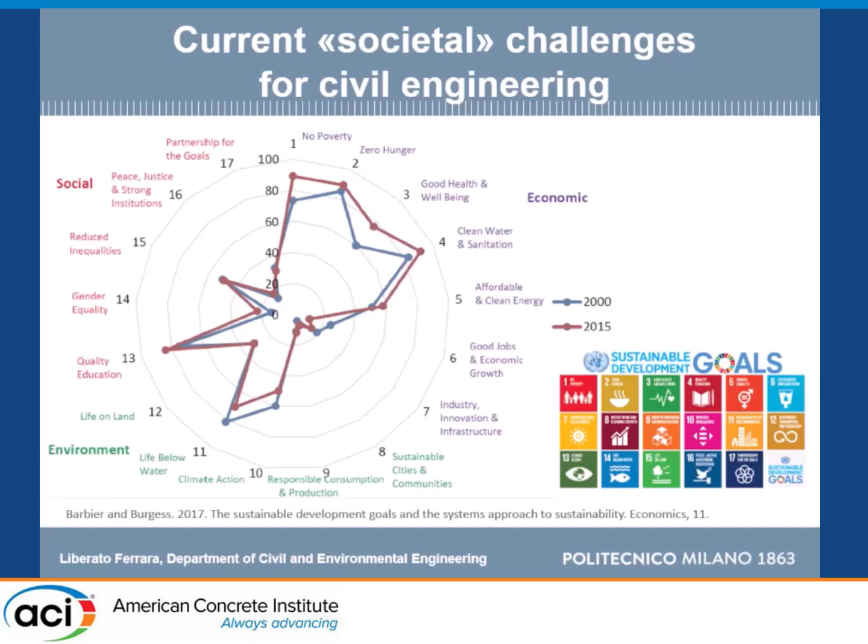Just to set the frame, we all know nowadays that we have to consider in each of our activities the Sustainable Development Goals of the United Nations. Some of them, written here in green, but also number 7, are strictly related to our work, our profession as civil engineers.

So I tried to set the goal. Which scenario? This picture, Tony, you might remember, we were together in Rio de Janeiro and Belo Horizonte in 2018 at the Ferrocement conference. We had a good time there. This is in Rio de Janeiro, the Museum of Tomorrow, Museu do Amanhã.

When I visited it on that occasion, I was really struck by this message: humankind has become a geological force, so strong that it is able to shape the planet. Which way? Well, more than half of the world population, and in a few years two-thirds of it, is going to live in urban areas.

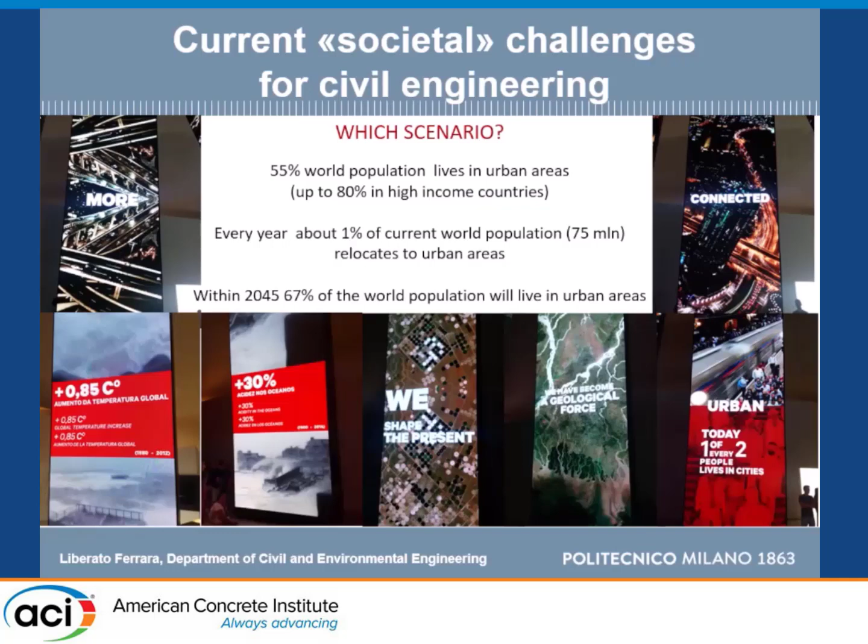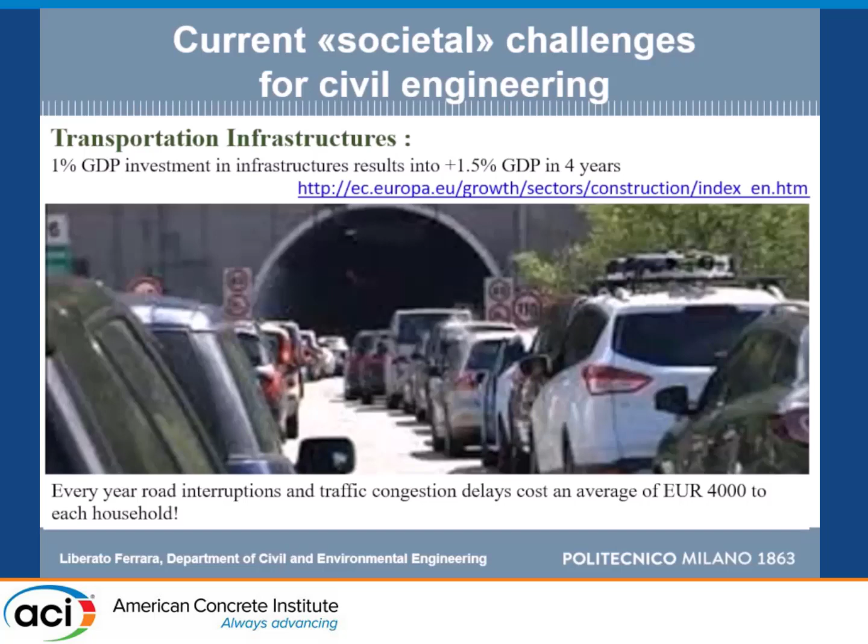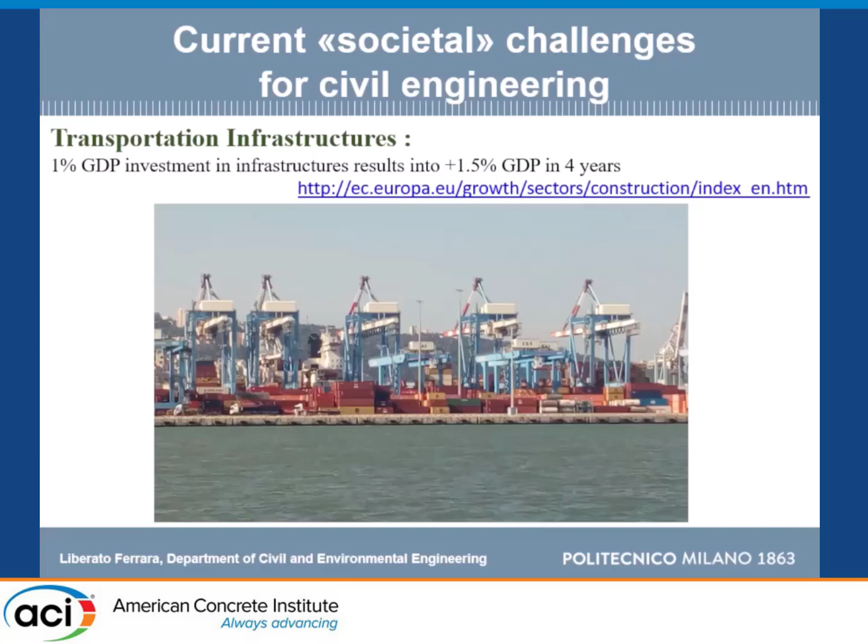We must build new ports for freight. This is the port of Haifa in the Mediterranean. They are increasing the capacity to host freight ships up to 400 meters long. This is a structural service scenario which is quite demanding for concrete structures.

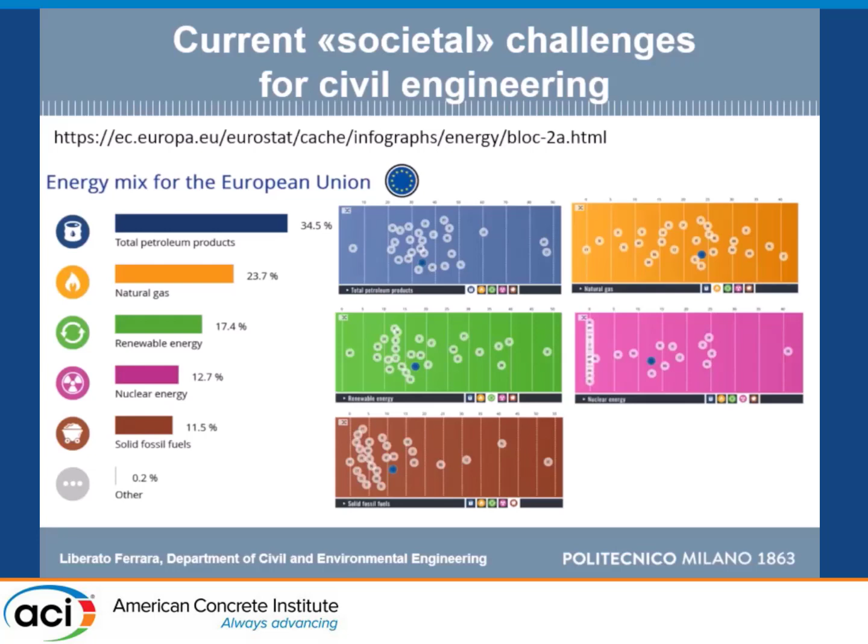We need to protect coasts from extreme climate events. And we also need to reduce our dependency on fossil fuels, which are one of the main problems for CO2 emissions. This is the survey by the European Union, and you can see that we still depend a lot on oil and fossil fuels, 34.5% on average, but in some countries quite much more.

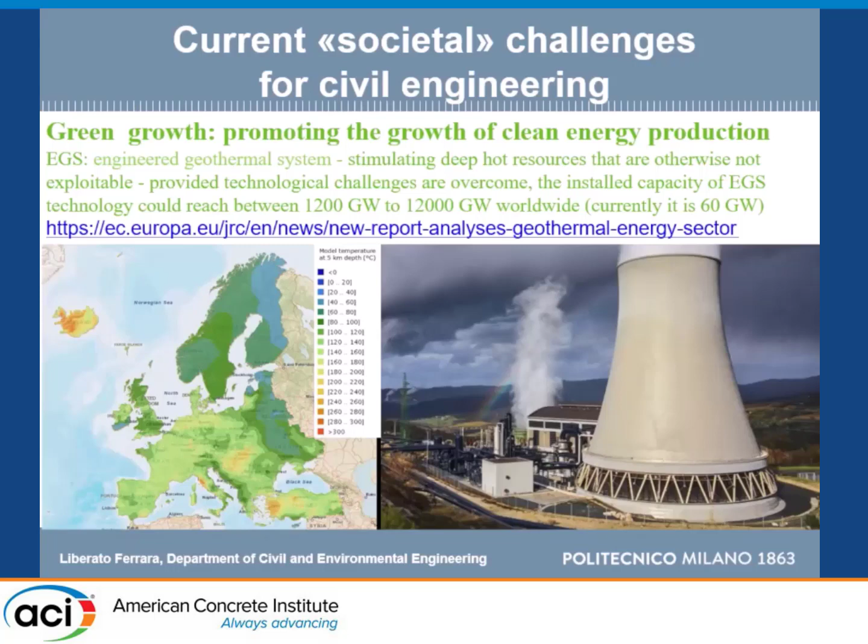So we must go higher, for example in harvesting stronger winds with higher towers. We must go deeper in exploiting at best the geothermal energy and other forms of renewables. And we need concrete for this. There is no alternative at all.

Probably some of you listened to our colleague Professor Karen Scrivener this morning, and according to her estimates and calculations, we will need to deforest an area as large as India every year if we would like to build with timber instead of concrete, which is not impossible, but then you must allow enough time for the timber to grow back and be used.

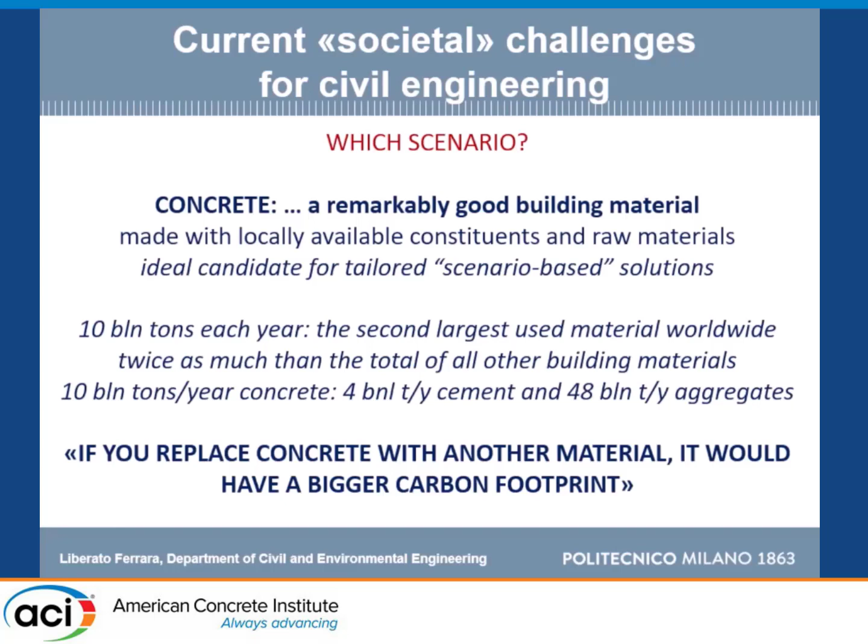But this poses also the problem that we use a lot of natural resources. We need to produce a lot of cement, which emits CO2. So which possibilities do we have? Well, reduce the CO2 from clinker production, reduce the clinker in cement — progress that has been made by the cement industry.

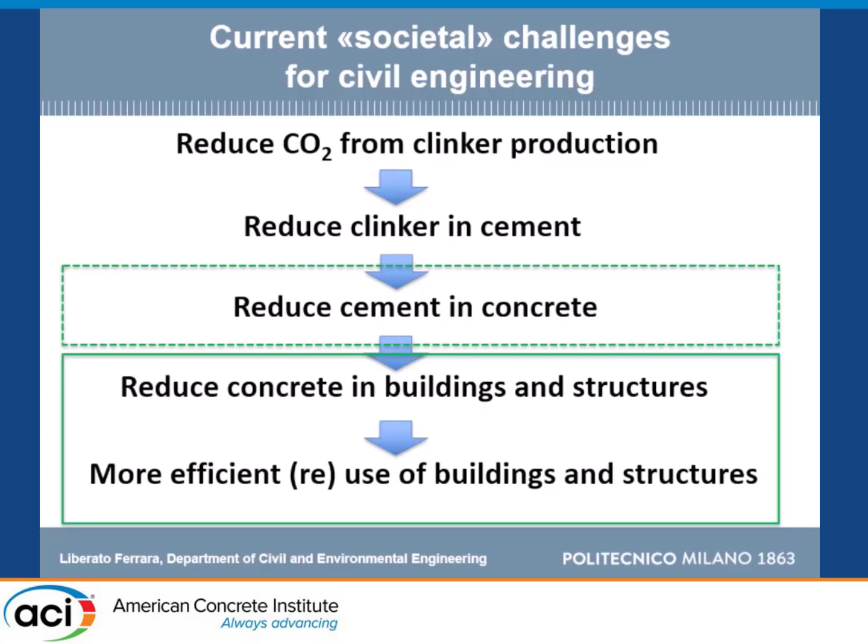Our work as engineers working with materials and structures in the concrete field is to reduce cement in concrete, reduce concrete in buildings, and as academics, I will say, also educate the final stakeholders to make more efficient use and reuse of buildings.

The issue is, which performance are we requiring from concrete? Well, we surely require compressive strength, and we look at the binder consumption. But the importance is also the metrics that we use. If we just look at the consumption of binder or cement per cubic meter, we will say, okay, higher performance concrete requires more cement per cubic meter, so it's less sustainable.

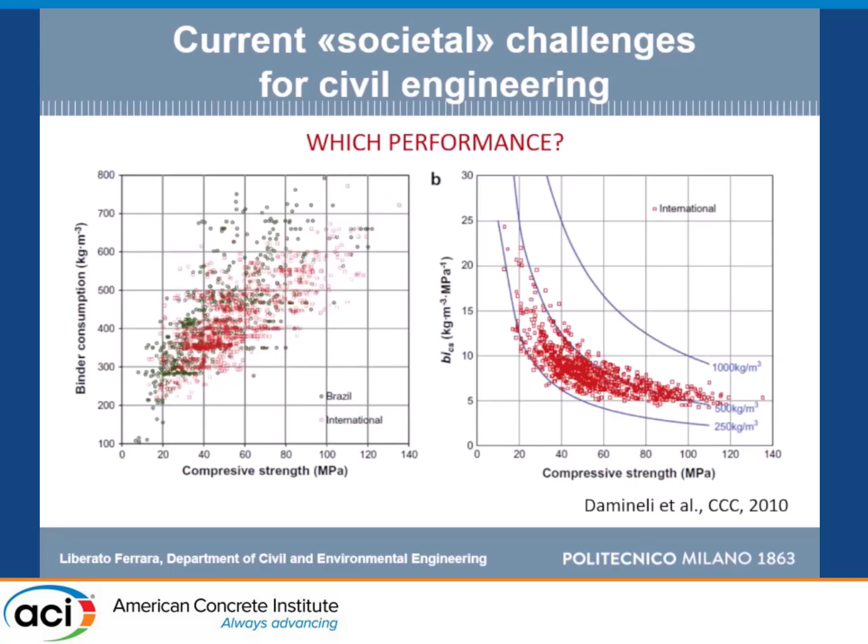That is not the right metric to look at. Look instead at the dosage per cubic meter of binder that you need to produce a unit of strength. You can see that the higher you go, the more efficient you become in this.

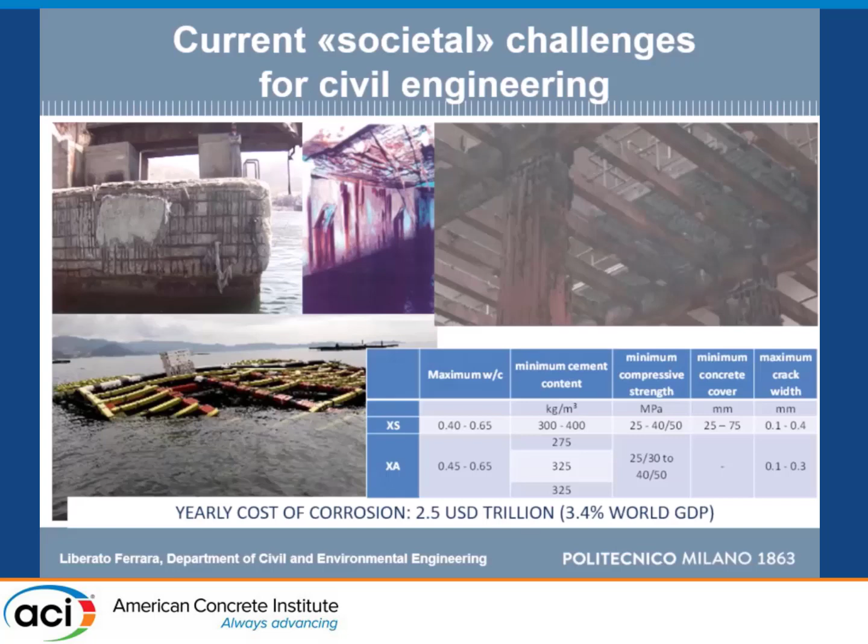But the other thing is that we also require durability and resilience. And in this, I will say, our codes are still lagging behind. They are mostly prescriptive, and prescriptions based on composition can jeopardize the uptake of innovation by industry and the progress that knowledge has made.

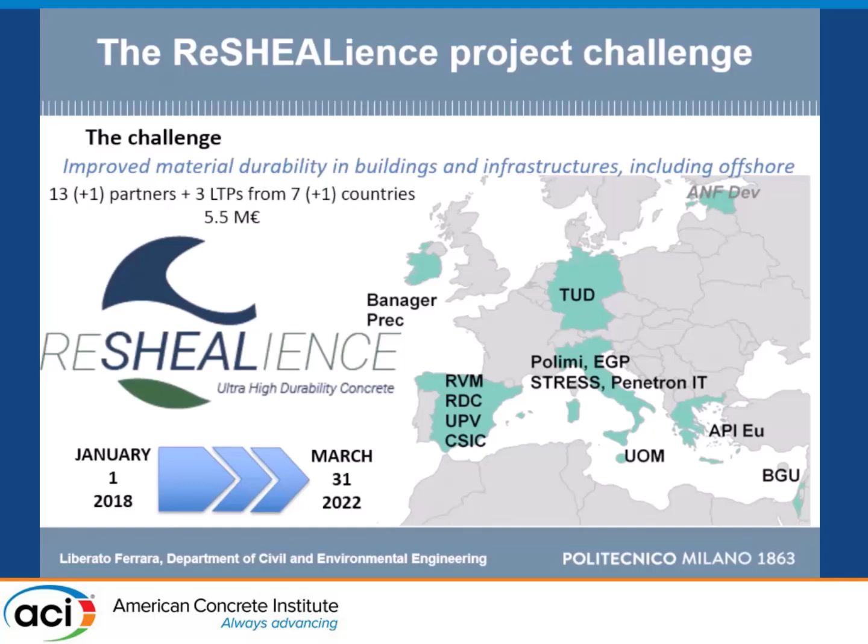So this was the context in which we moved at the level of a European consortium of 14 partners. We got funding from the European Union of about 5.5 million euros, and we have been working for more than 4 years trying to address this challenge.

These are the partners of the consortium, including academia and industries from the whole value chain of the concrete industry. I had the privilege to coordinate this, so we acted at three levels: product, process, and context.

For product, we say, let's not speak simply about ultra-high performance. Let's put durability into the name. This is not a new material. It's simply a new way to look at what already exists.

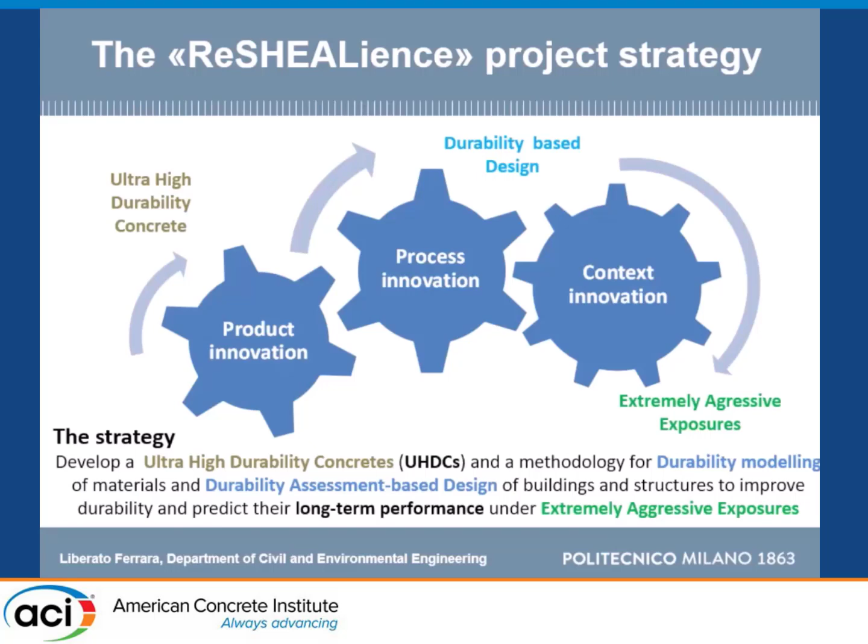But let's try to embed durability into the design. So we started with UHPC. This was the first casting that we made. There is a Springsteen soundtrack behind, I hope you will not mind me for copyright.

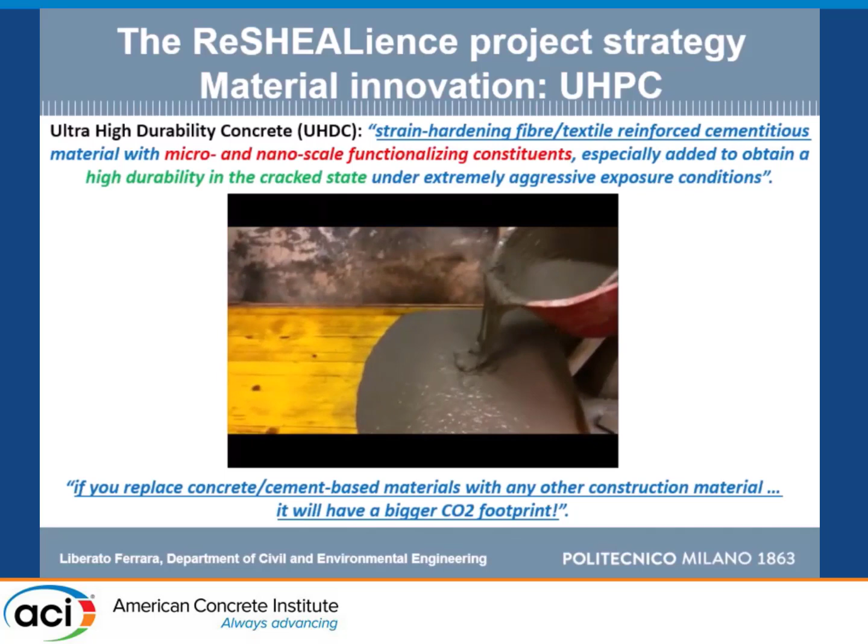The signature feature of this material is that it develops a strain hardening response under tension, which makes it different from conventional concrete.

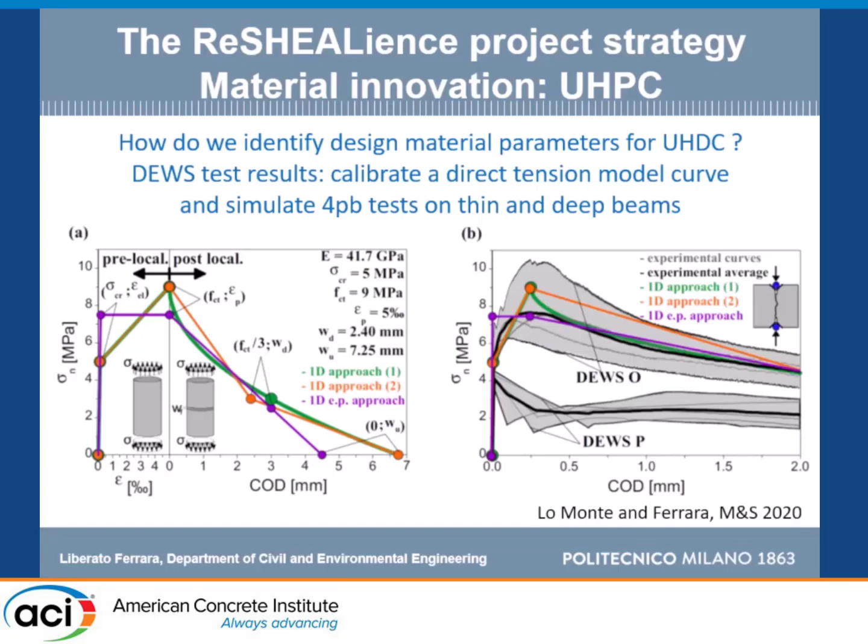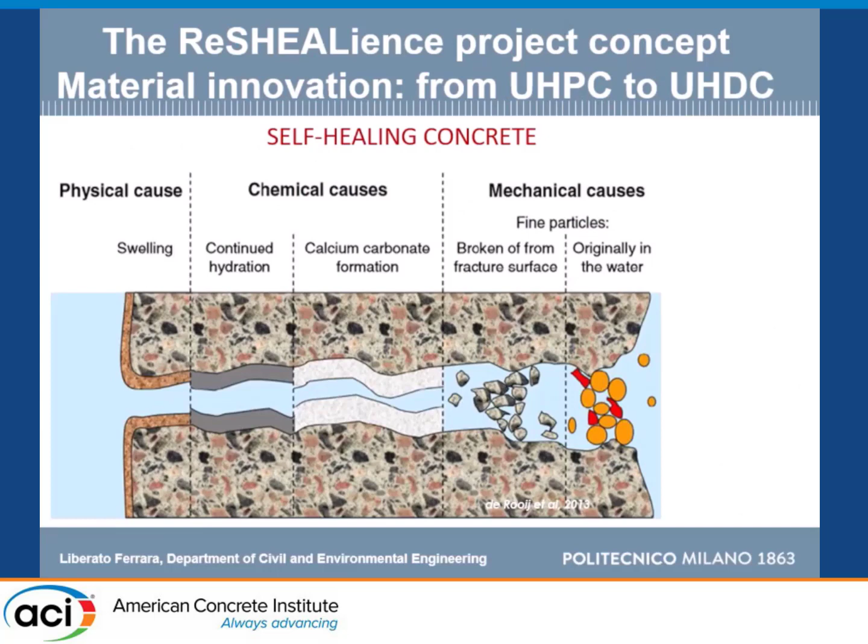We identified the mechanical properties according to different tests, but we also wanted to promote a signature durability feature, its capacity to self-heal the cracks, mainly due to continued hydration and calcium carbonate.

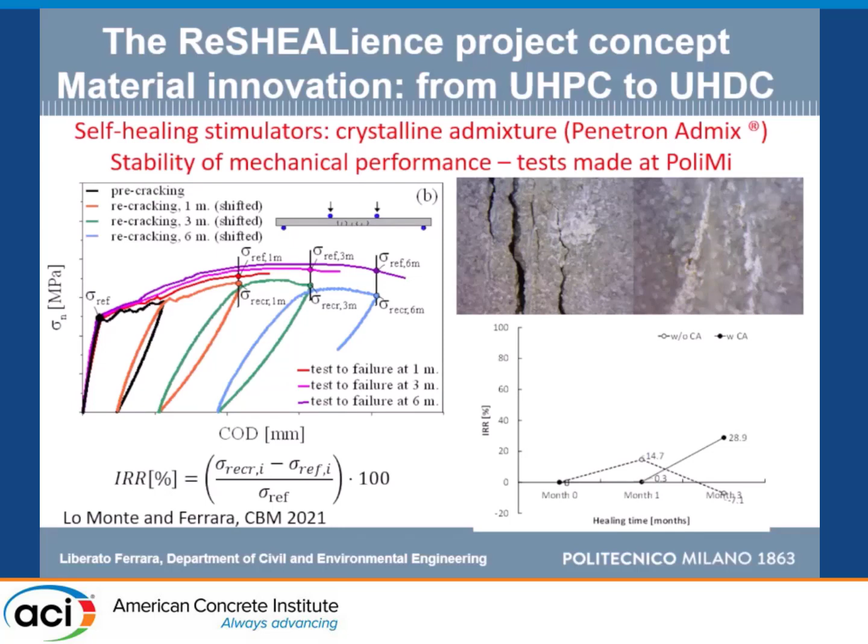And you can see here some images. This crack, which was completely closed, not only the performance over time stayed constant, the material performance and the structural performance. We performed some microscopic investigation also to understand the reasons of this.

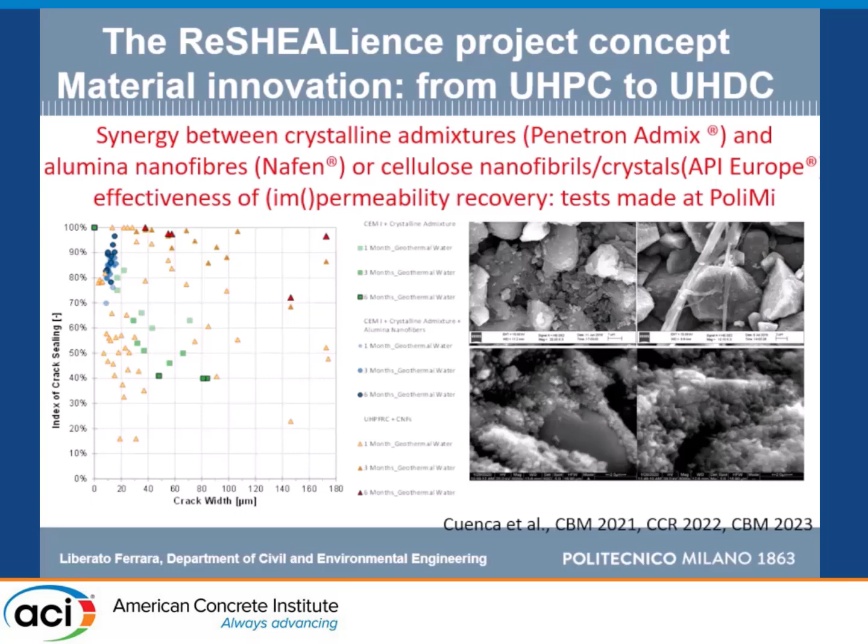We also boosted it through the use of nanotechnology. You can see these data points here, in which we used alumina nanofibers. We were able to keep the opening of the single crack below tens of microns, which are really, really very narrow, no hamper for durability.

Then we had to scale up from the lab to the construction site, not mixing 50 liters, but mixing 500 liters per batch. So there was also education of construction companies to this.

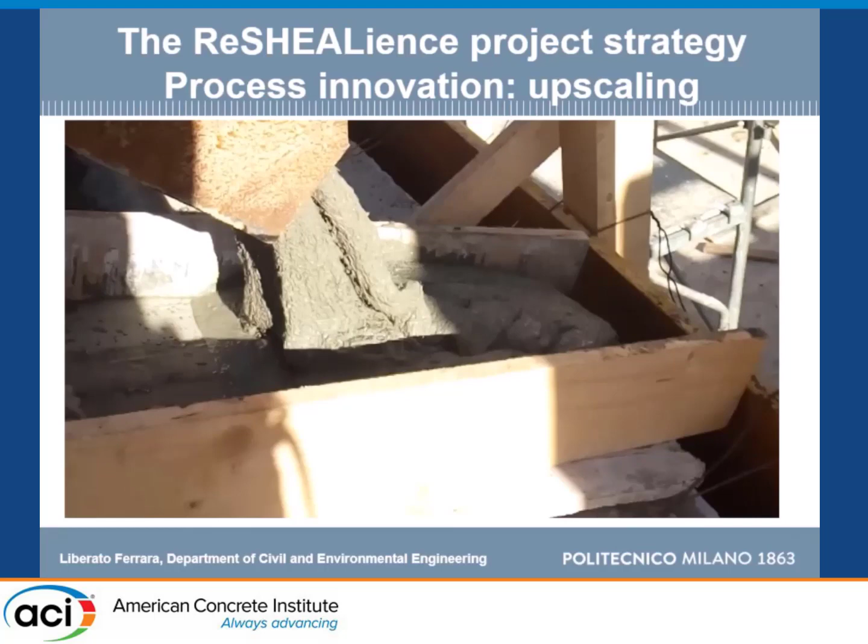And we used these materials in 6 full-scale pilots, 2 in Italy, 2 in Spain, 1 in Ireland, and we retrofitted this water tower in the island of Malta.

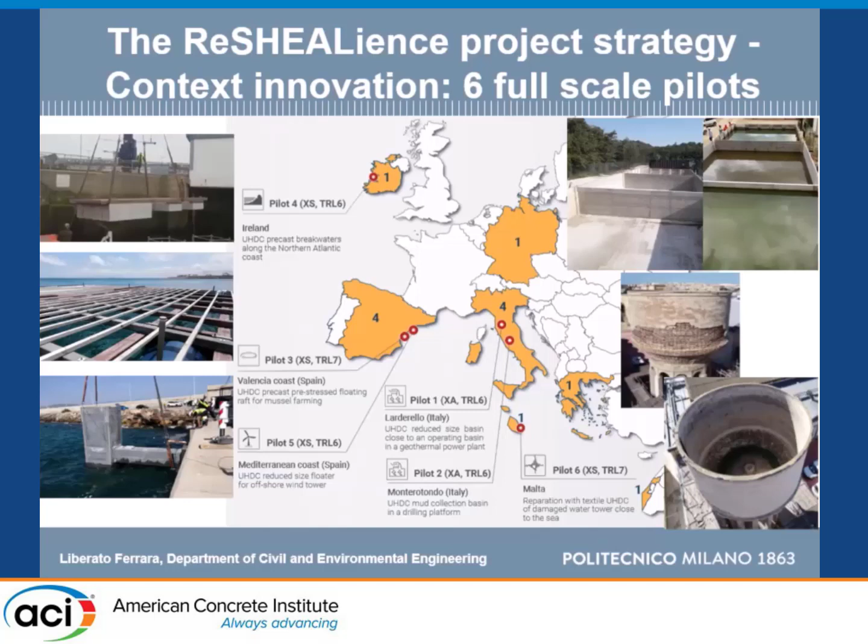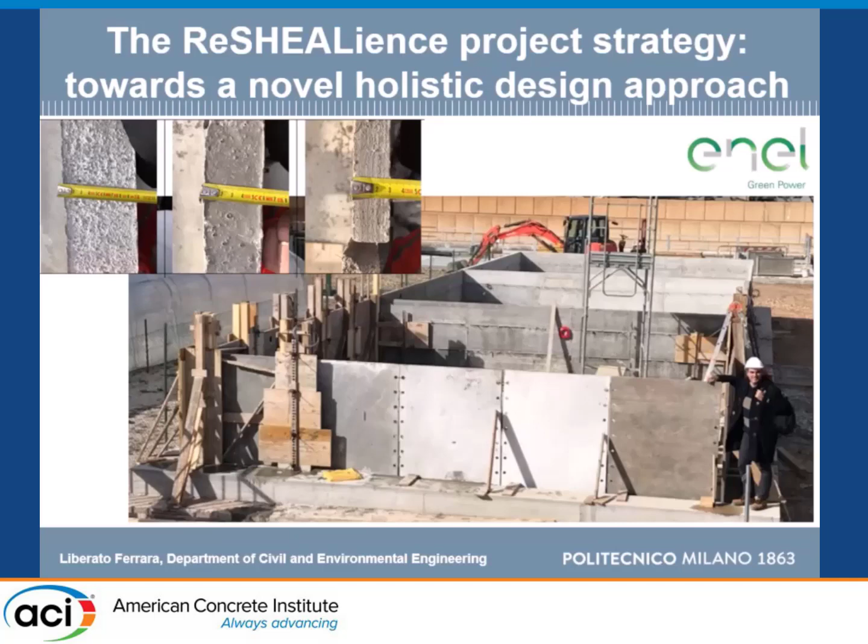This is one of the Italian pilots, ordinary reinforced concrete, 10 centimeter thick, precast UHPC, 3 centimeter thick. And you can see here the load validation.

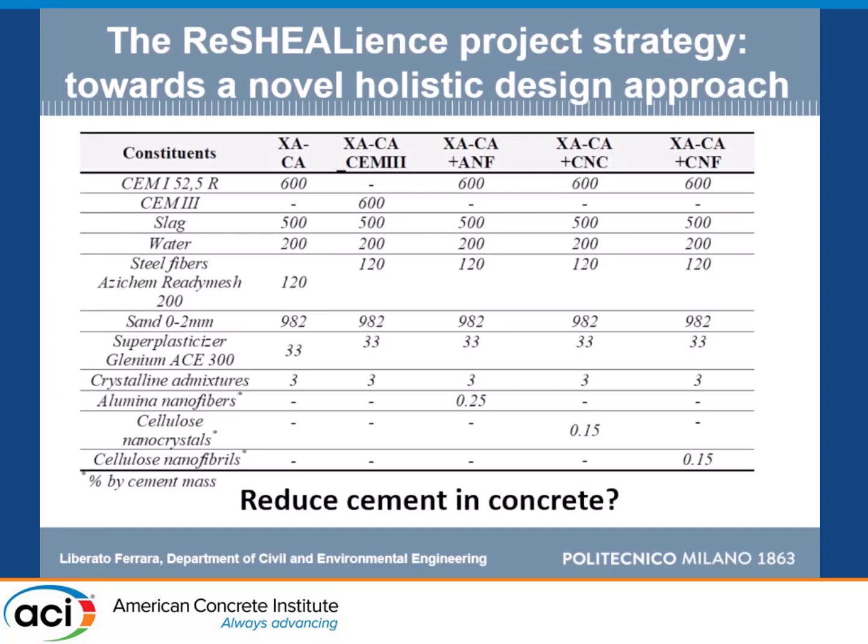So when you end up with reducing cement in concrete and look at the mix design, say with 600 kilos per cubic meter of cement, you have not reduced the cement in concrete.

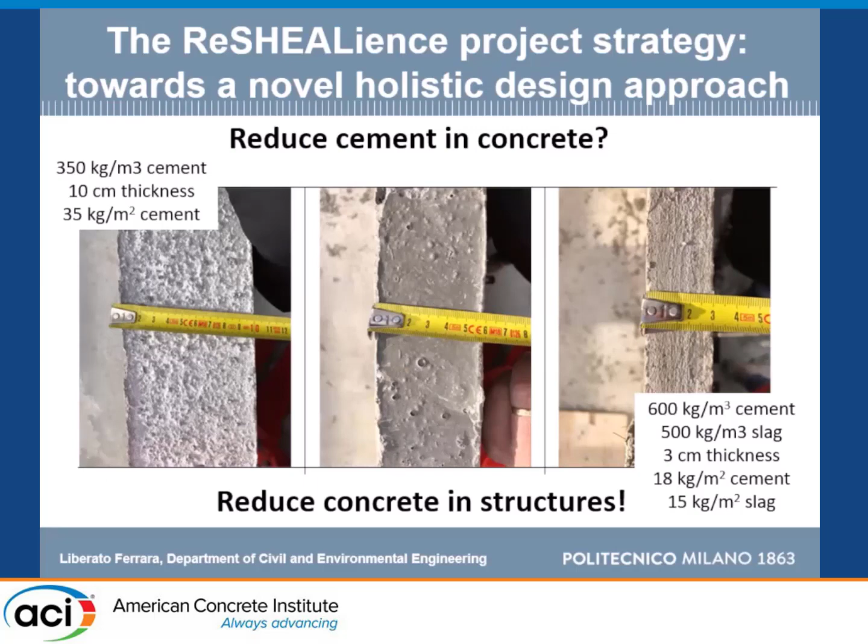But if you look at the square meter of wall, you go for an ordinary concrete from 35 kilos per square meter to our solution, which is just 18 kilos per square meter. So obviously we have different solutions, different performance, different costs.

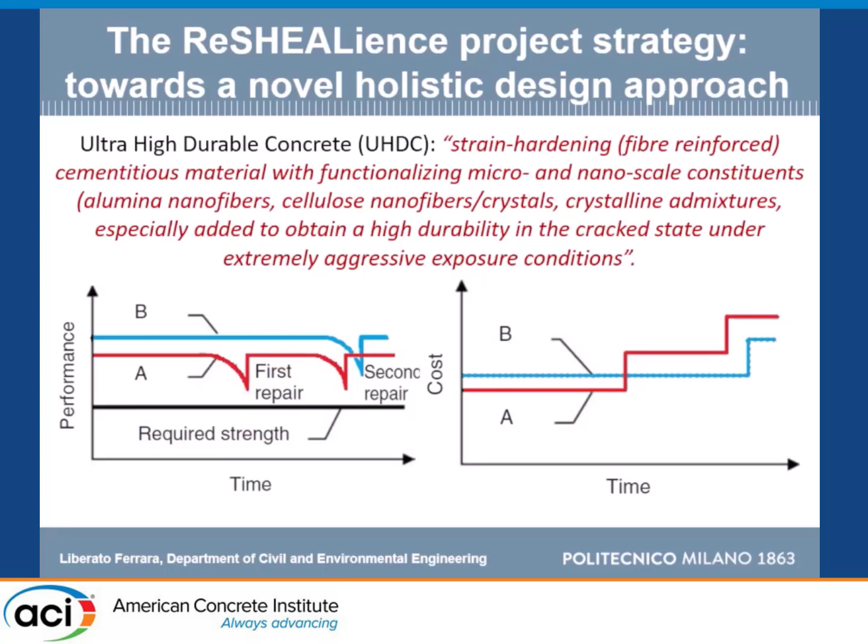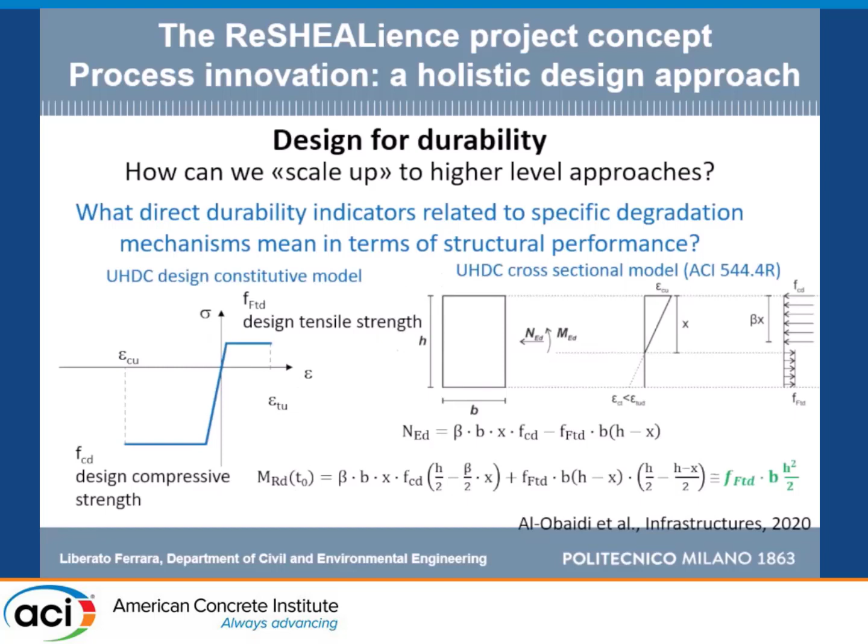The issue is that we must frame this into a life cycle perspective. This is the other way to look into that. So we embedded into structural design equations the degradation mechanism for chlorides or sulfates, ending up to predict the evolution of any indicator of mechanical performance, could be the maximum bending moment, so on, over time.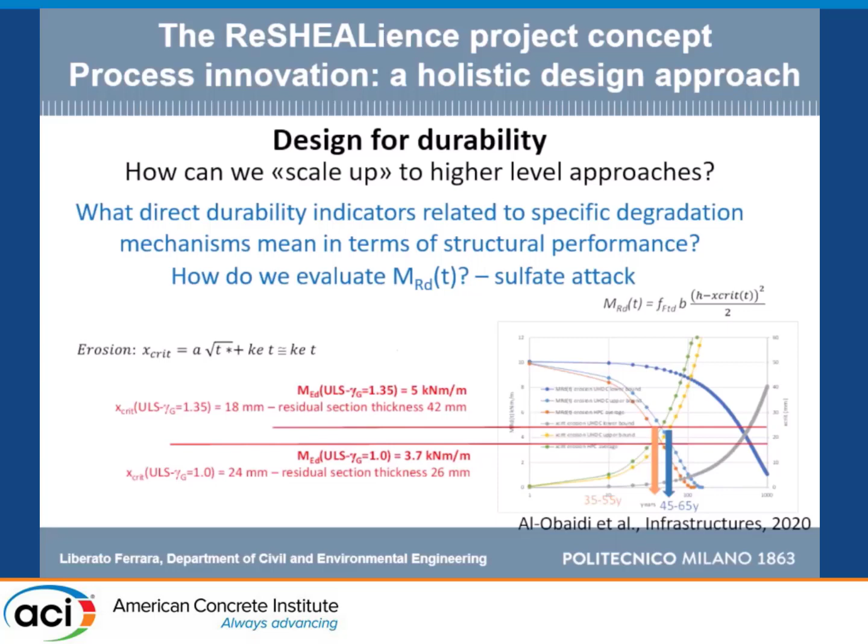So we demonstrated the increase of service life in going from ordinary concrete to ultra-high performance concrete. We validated it through laboratory results, and these are the results of the LCA, and these are the results of the LCC.

For an ordinary structure, you go for 400 millimeter thick walls to 100 millimeter thick walls in the case of UHPC. Construction costs remain quite the same because of the reduction of the overall volume, but with ordinary concrete, you increase maintenance because of degradation and corrosion, and with UHPC, you use much less.

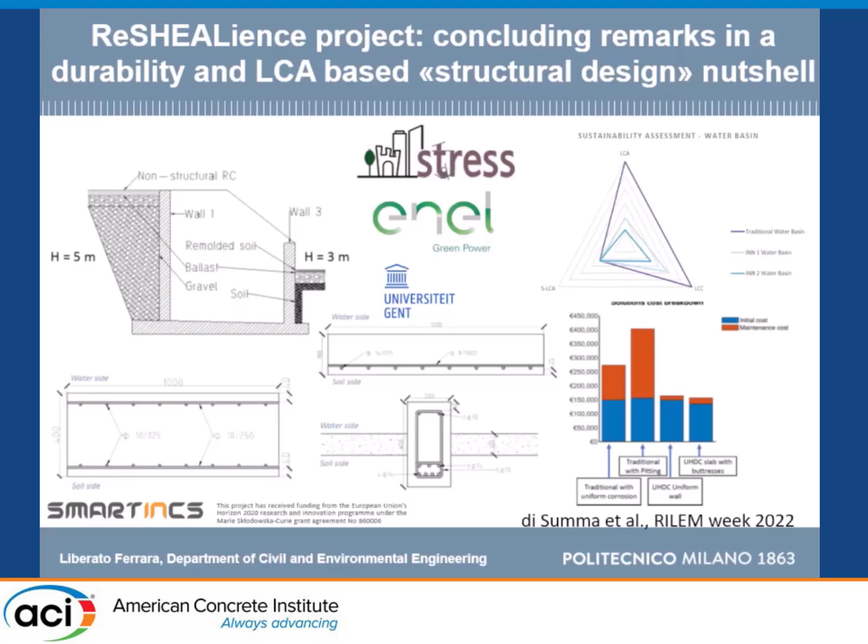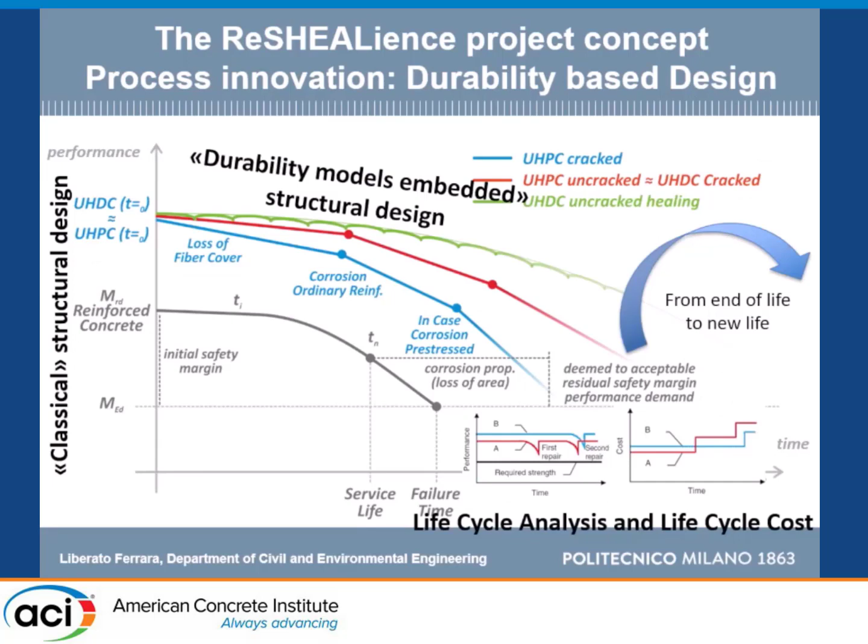What happens at the end? Because if you say that a structure lasts 100 years, probably your stakeholder will say, I don't need it. In 50 years, I will abandon the site and so on. So we try to address the recyclability of this material.

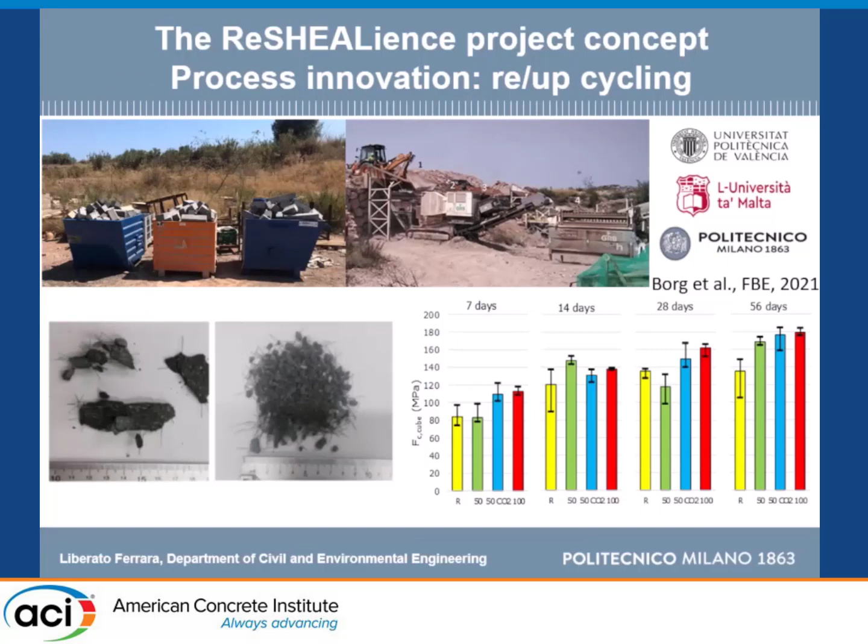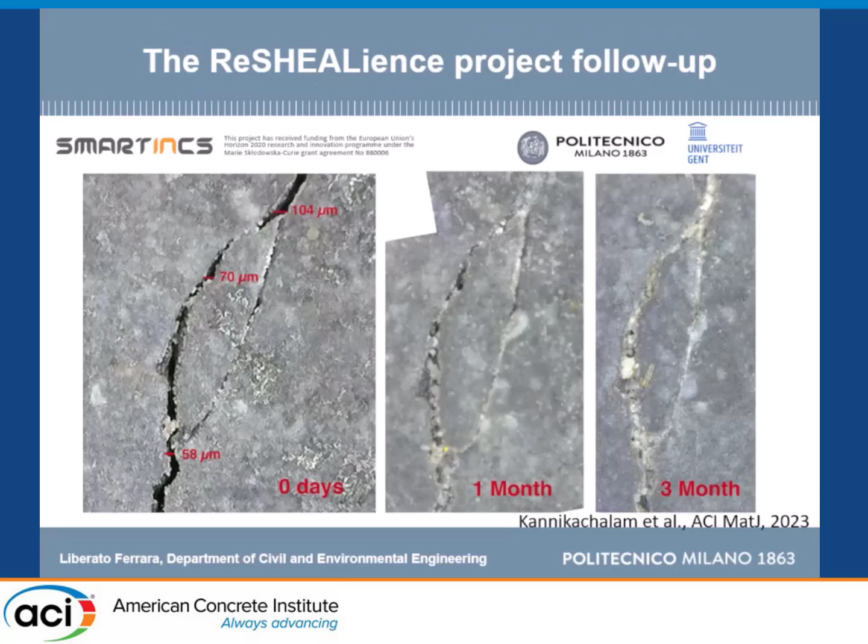And we demonstrated that you can keep the mechanical performance. This is the compressive strength. You can also use, with fine crushing, this material as a partial replacement of cement and not only of aggregate. And we kept the self-healing capacity of this material as well.